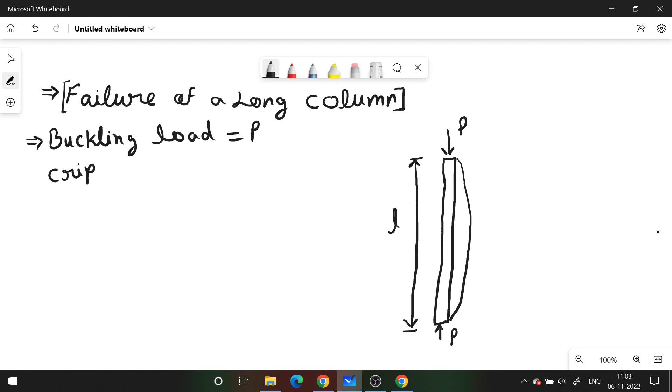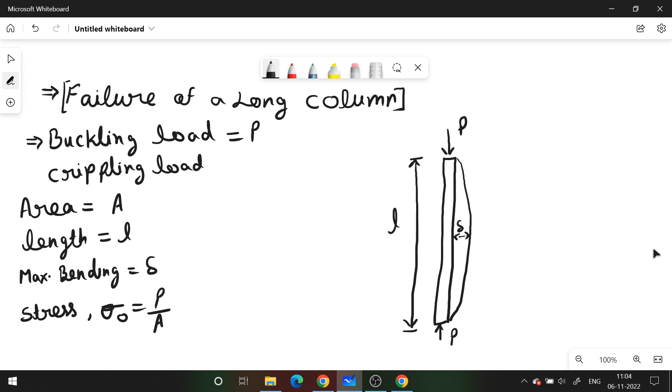Okay, area of the column is A, length of the column is L. Let maximum deflection is delta, maximum bending or deflection is delta, and direct stress is equal to sigma naught is equal to load upon area. Okay.

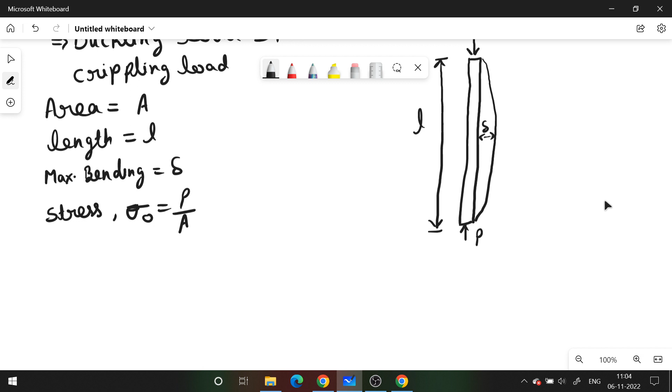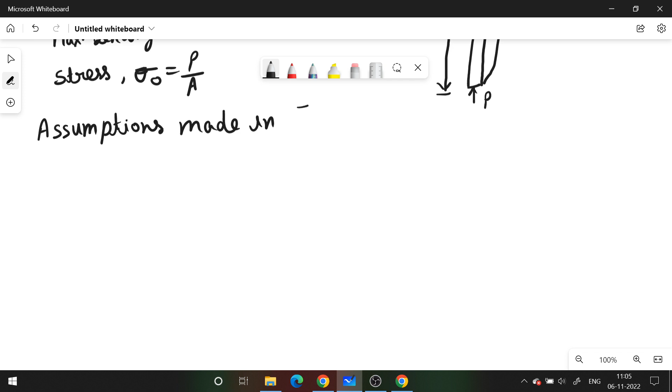So before determining the buckling load or crippling load for a given long column, some assumptions have been made according to Euler's theory for the columns. Now, firstly, assumptions made in Euler's column theory. Okay.

First assumption for the Euler's column theory is the column is initially perfectly straight and the load is applied axially.

Okay. So before calculating the crippling load, first assumption is the column is initially perfectly straight and the load is applied axially.

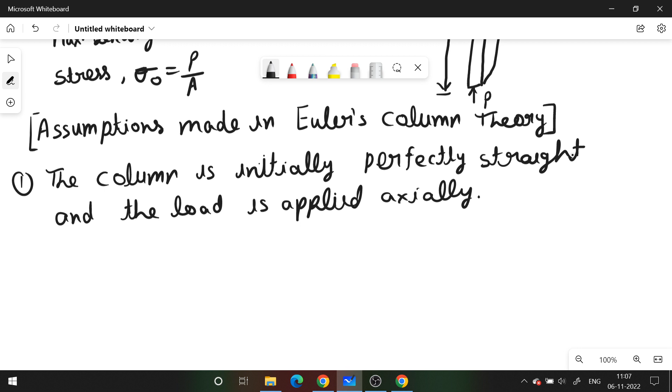The second assumption, the cross section of column is uniform throughout its length.

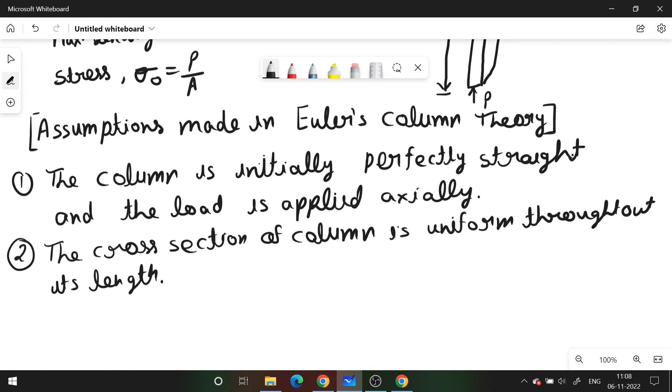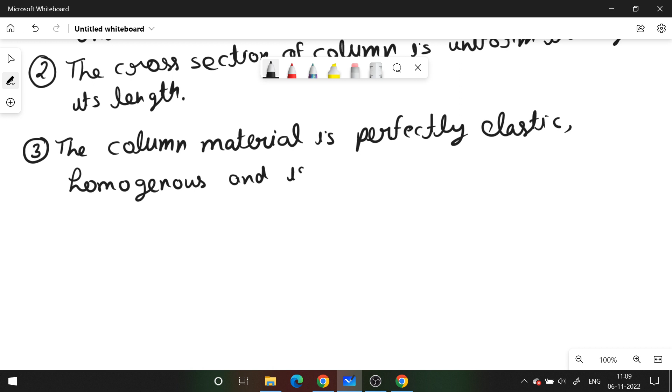Third assumption is the column material is perfectly elastic, homogeneous, and isotropic, and obeys Hooke's law.

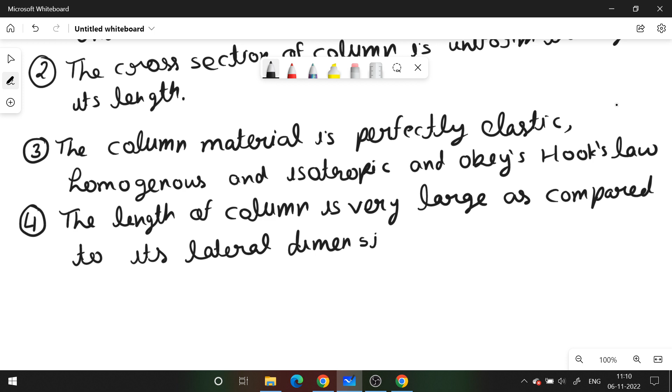Hooke's law: stress is directly proportional to the strain within the elastic limit. Next assumption for Euler's column theory: the length of the column is very large as compared to its lateral dimensions. Okay.

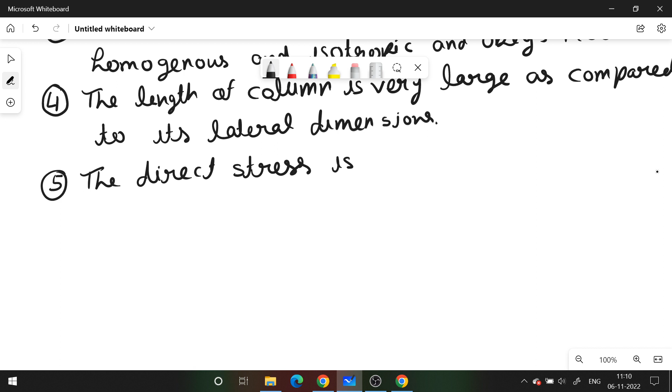Fifth assumption, the direct stress is very small as compared to, oh, as compared to the bending stress. Okay.

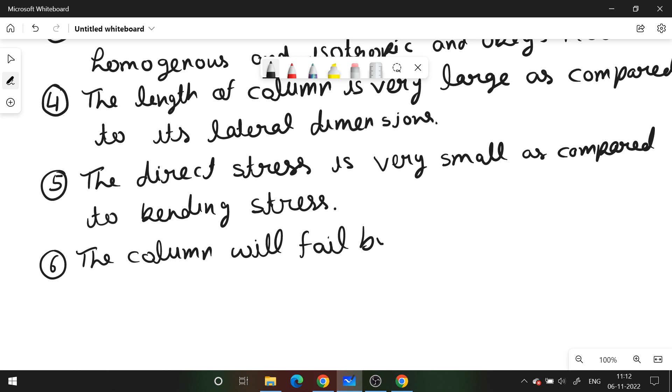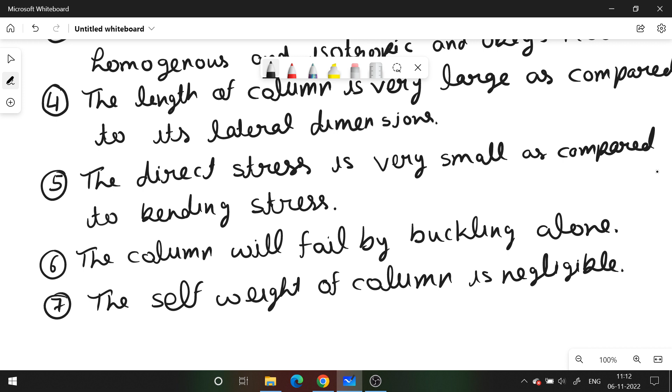The next assumption for the Euler's column theory is the column will fail by buckling alone. And the last assumption, the self weight of column is negligible. Okay, these are the assumptions for Euler's column theory.

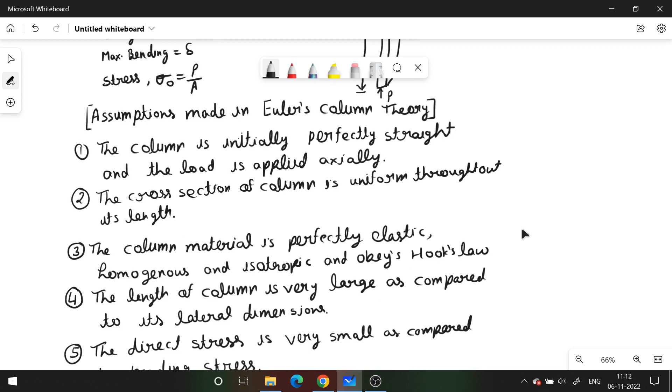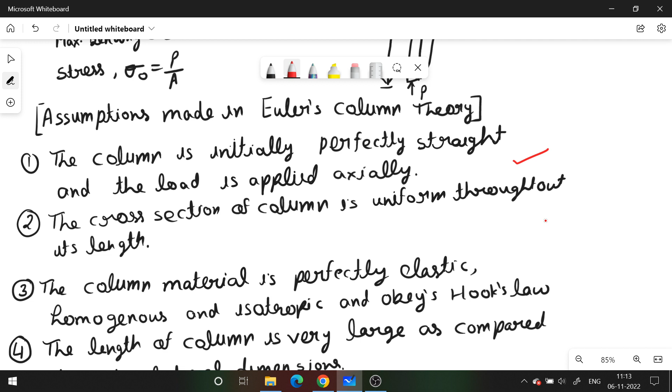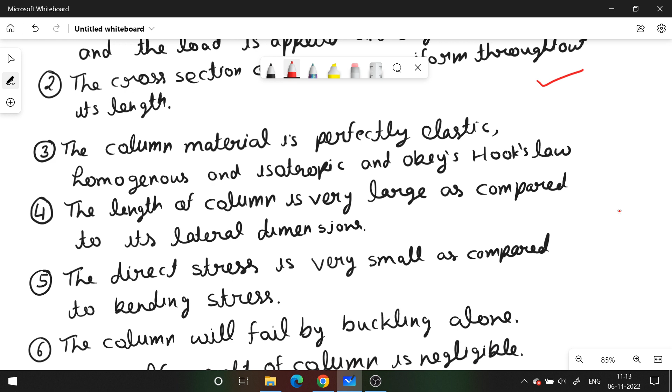With the help of the Euler's column theory, we can determine the crippling or buckling load for the long columns. So the first assumption for the Euler's column theory is the column is initially perfectly straight, and the load is applied axially. Second assumption is the cross section of column is uniform throughout its length. Third assumption is the column material is perfectly elastic, homogeneous and isotropic and obeys Hooke's law.

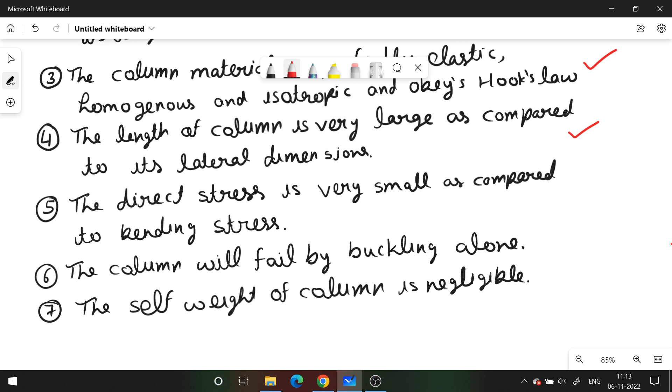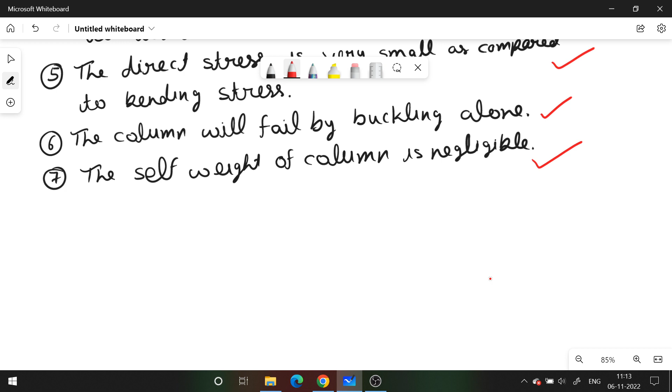Okay, and the fourth assumption is the length of the column is very large as compared to its lateral dimensions. And fifth assumption is the direct stress is very small as compared to bending stress. And sixth assumption is the column will fail by buckling alone. And the last assumption is the self weight of column is negligible. Okay, these are the assumptions for the long columns. Okay,

now there are four end conditions for the long columns. So for different end conditions, we have to determine the buckling and crippling load. Okay, end conditions for long columns.

So first end condition is when both the ends of column are hinged, or pin jointed. Okay. Second end condition is both the ends of column are fixed.

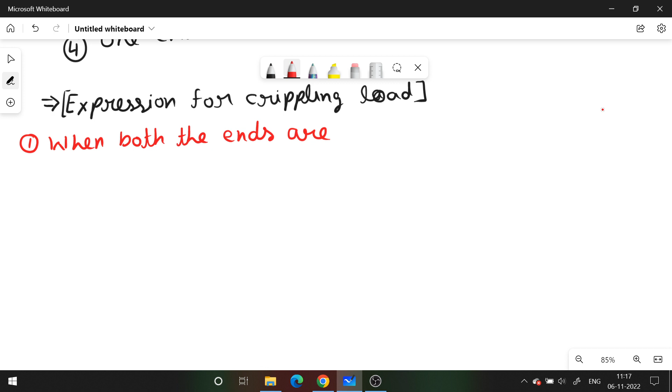Now, expression for crippling load. First end condition is when both the ends are hinged. Okay, when both the ends are hinged, determining the expression for crippling load.

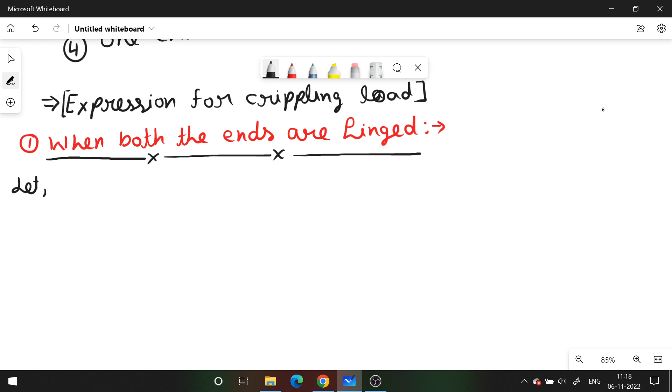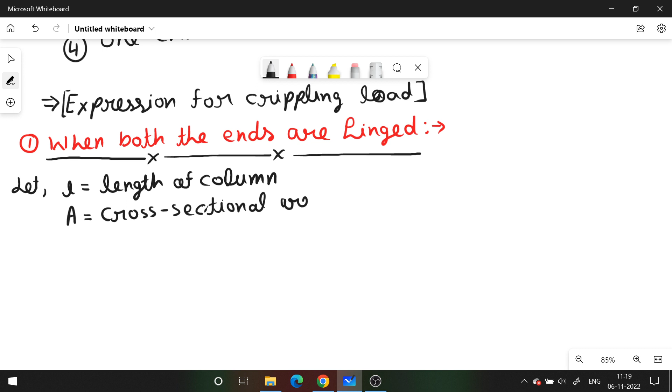Let us consider a long column of length L. A is the cross sectional area. P is the buckling load, a load at which column starts to buckle. Buckling load, the load at which buckling will start. Okay.

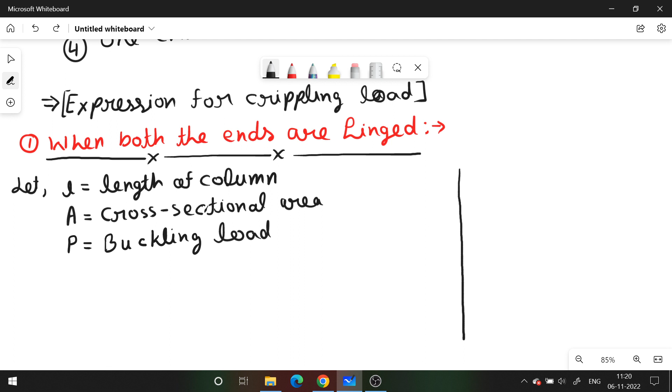Okay. So consider a column AB of length L.

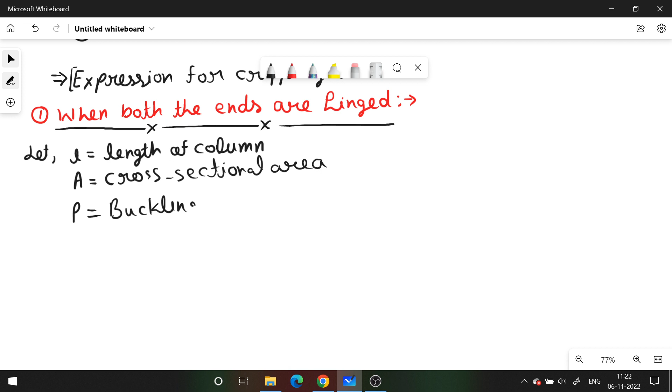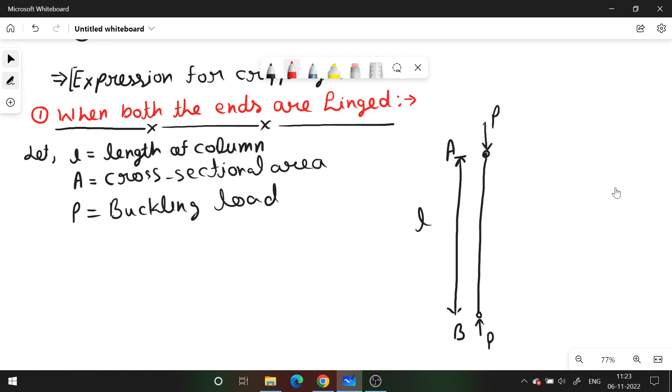A is the cross-sectional area of the column. P is the buckling load. Okay. So consider a long column AB of length L. A compressive load P is applied due to which column buckles about its length.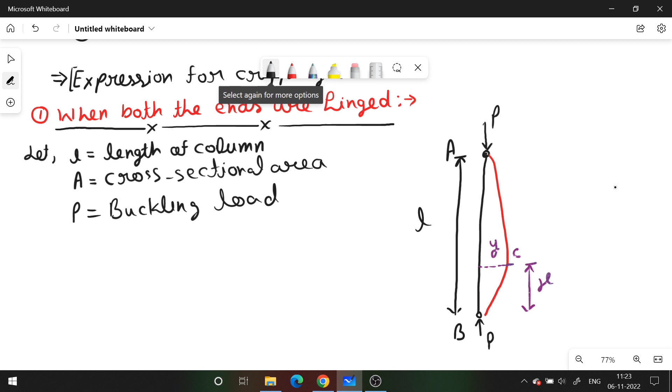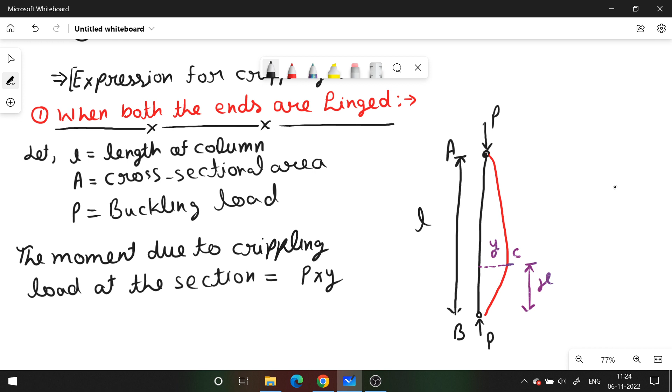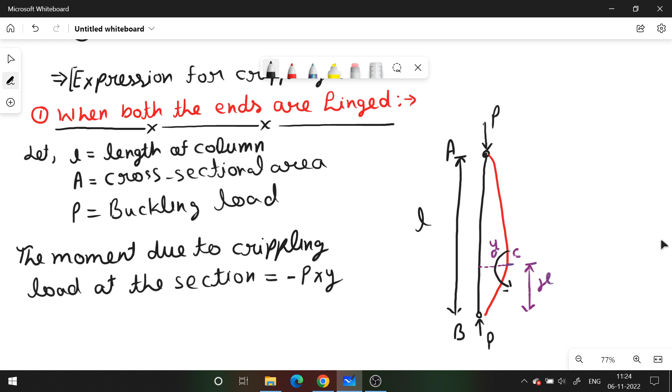Let us consider a section at a distance x from the point B, and the deflection at that section is y. Okay. Now the moment due to crippling load at the section will be equal to the load into perpendicular distance, and this moment will be in anti-clockwise direction. So consider this moment as a negative moment. Here negative sign shows that the moment about the section is in counterclockwise direction.

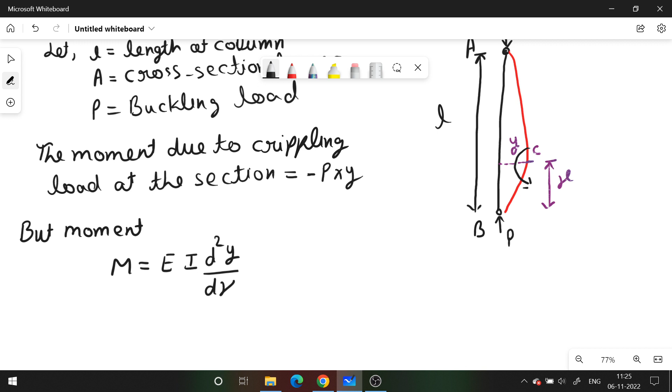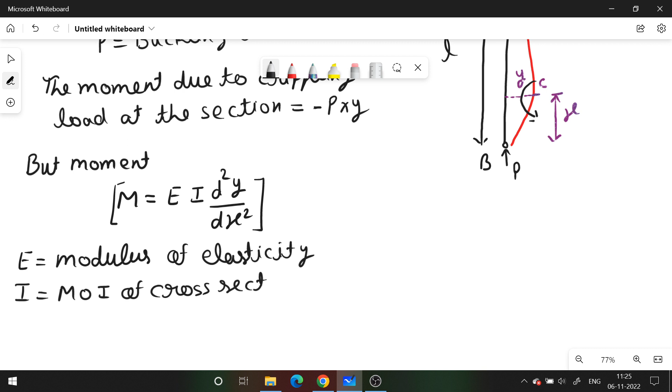But from the flexural rigidity or from the deflection equation, the bending moment about this section will also equal to EI d2y over dx square, if capital E is the modulus of elasticity of material, and I is the moment of inertia of cross section about its axis. This is the least moment of inertia.

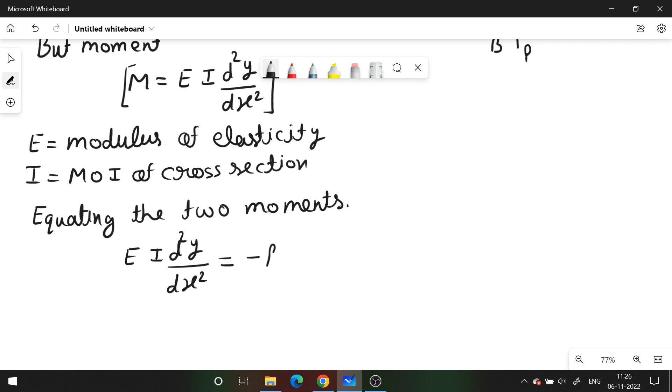Okay. Now equating the two moments, EI d2y over dx square will be equal to minus P into y, or EI d2y over dx square plus P into y is equal to 0. Now dividing by EI, d2y over dx square plus P upon EI y is equal to 0. Okay, this is a differential equation, and the solution of the above differential equation

is y is equal to C1 cos x under root P upon EI plus C2 sin x under root P upon EI. This is the equation number 1. Here C1 and C2 are constants of integration.

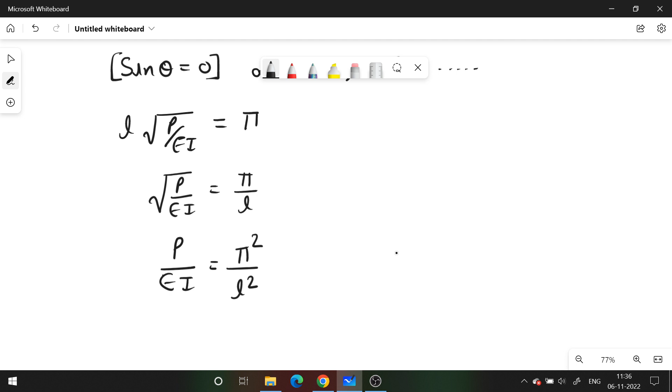Now consider the first non-zero value. When L under root P upon EI equal to pi, sine L under root P upon EI will be equal to 0, or under root P upon EI is equal to pi by L, or P upon EI is equal to pi square upon L square, or P will be equal to pi square EI upon L square.

Okay, so for a long column whose both the ends are pin jointed, in that case the buckling load will be equal to pi square into E into I upon L square. Okay.

Now taking the second case, when both the ends are fixed. Let us consider a column AB whose both the ends are fixed, and the length of the column is L.

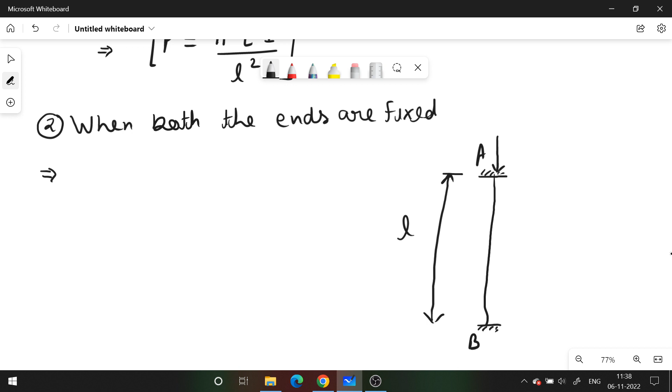The crippling load for this condition is P, and the column is buckled like this along the length of the column. Now the moment of resistance at the fixed ends is M naught due to the fixed ends. Okay.

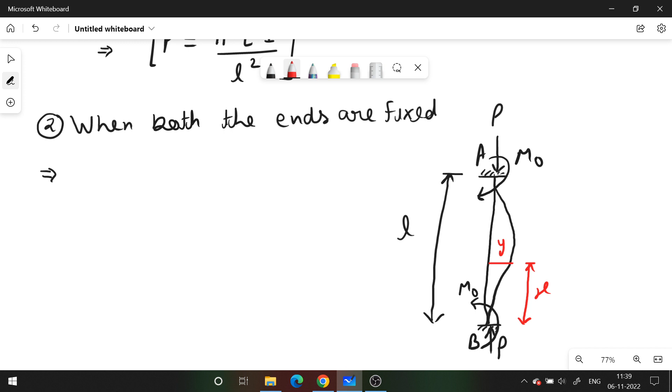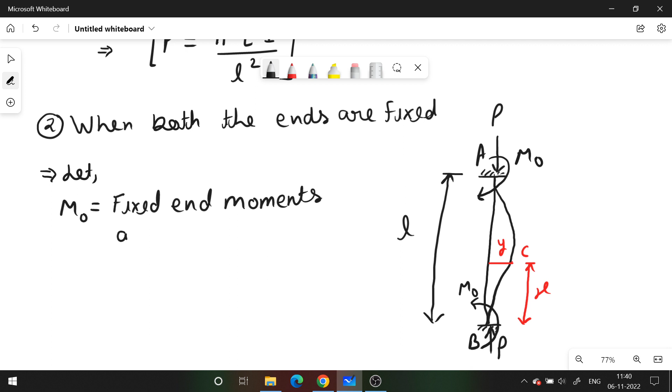Consider a section at a distance x from the point B, and the deflection at that point is y. Okay, let M naught be the fixed end moments at A and B. Okay.

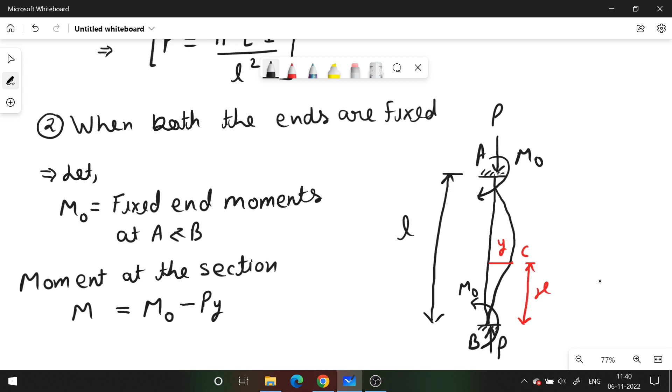Now moment at the section will be equal to M naught minus P into y. P into y is the moment generated by the load and M naught is the moment developed at the fixed ends. So the total moment about the section will be M naught minus Py.

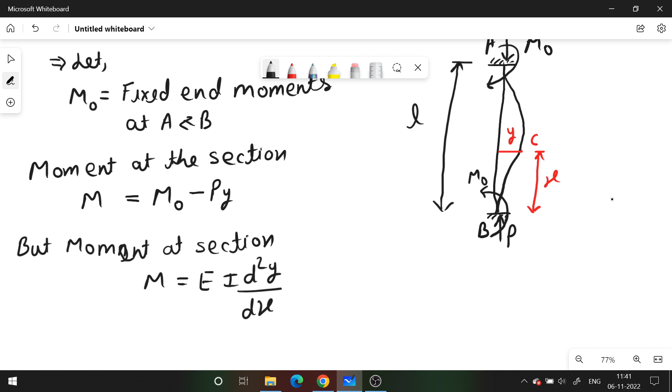But moment at the section M will be equal to EI d2y over dx square. Equating both the moments, EI d2y over dx square will be equal to M naught minus Py, or EI d2y over dx square plus Py is equal to M naught.

Now divide the equation by EI, so d2y over dx square plus P upon EI into y is equal to M naught upon EI. Okay, now multiply by P and divide by P, so d2y over dx square plus P upon EI into y is equal to M naught upon P into P upon EI.

Now the solution of this differential equation will be y is equal to C1 cos x under root P upon EI plus C2 sin x under root P upon EI plus M naught upon P.

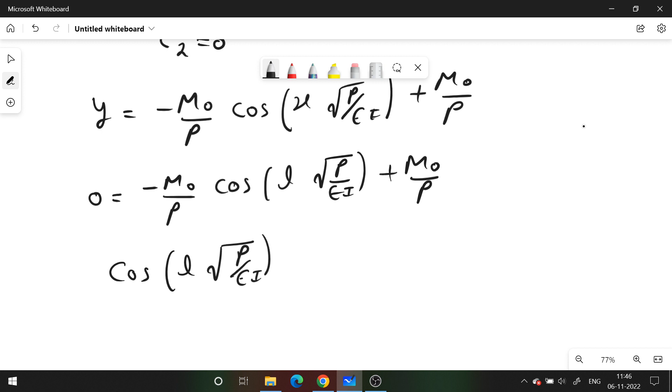Now applying the other end condition, at x is equal to L, y is equal to 0, so 0 equals minus M naught upon P cos L under root P upon EI plus M naught upon P. Now cos L under root P upon EI will be equal to 1. Cos theta is equal to 1 when theta is equal to 0, 2 pi, 4 pi and so on.

So taking the first non-zero value, L under root P upon EI is equal to 2 pi. So from here P will be equal to 4 pi square EI upon L square. So this will be the buckling load for a column whose both the ends are fixed. Here this equation can be